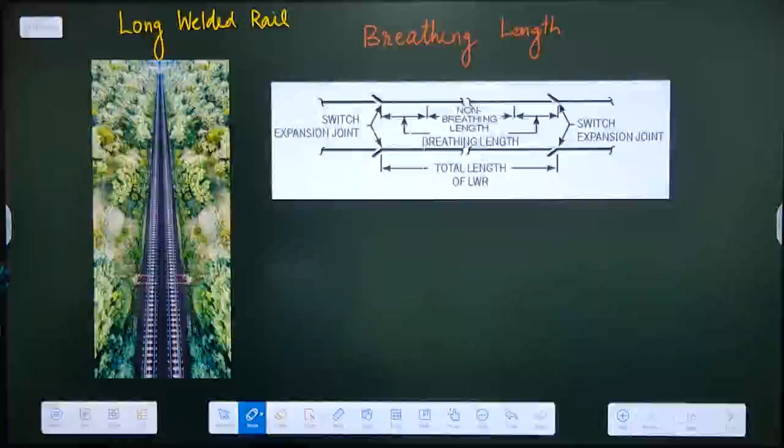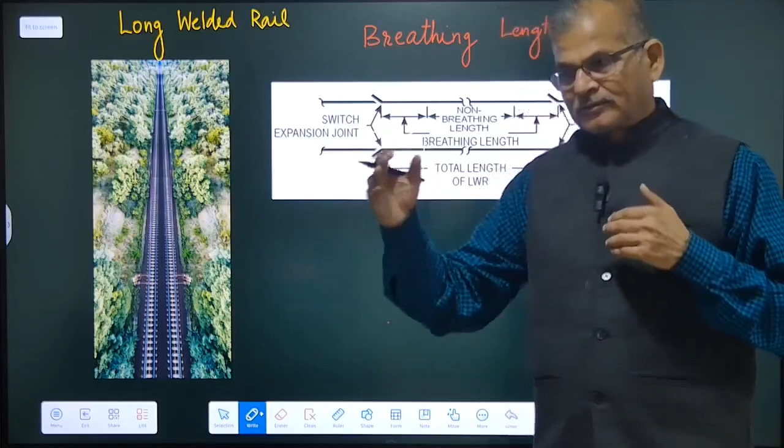आज के इस लेक्चर में हम लोग ब्रीदिंग लेंथ इन लॉन्ग वेल्डेड रेल के बारे में स्टडी करेंगे। लॉन्ग वेल्डेड रेल, जो भी रेल लेंथ, वेल्डेड रेल लेंथ मोर देन 250 मीटर से एबव होगा इन ए ब्रॉड गेज, दैट विल बी टर्म्ड एज ए लॉन्ग वेल्डेड रेल। आजकल इंडियन रेलवे जो भी रेल की लेंथ एक्सेप्ट कर रहा है, दैट इज मोर देन 260 मीटर। तो फॉर हाई स्पीड एंड लो मेंटेनेंस वी गो फॉर द लॉन्ग वेल्डेड रेल।

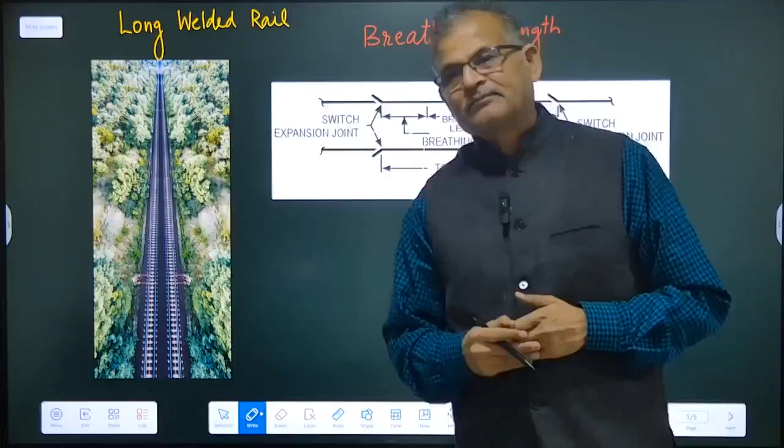इसमें किसी भी लॉन्ग वेल्डेड रेल को हम लोग 3 सेक्शन में बांट सकते हैं, 2 एंड्स और थर्ड इज ए सेंट्रल पोर्शन। जो सेंट्रल पोर्शन होता है नॉन ब्रीदिंग लेंथ होता है, दैट डजंट गो इन एक्सपेंशन एंड कॉन्ट्रैक्शन।

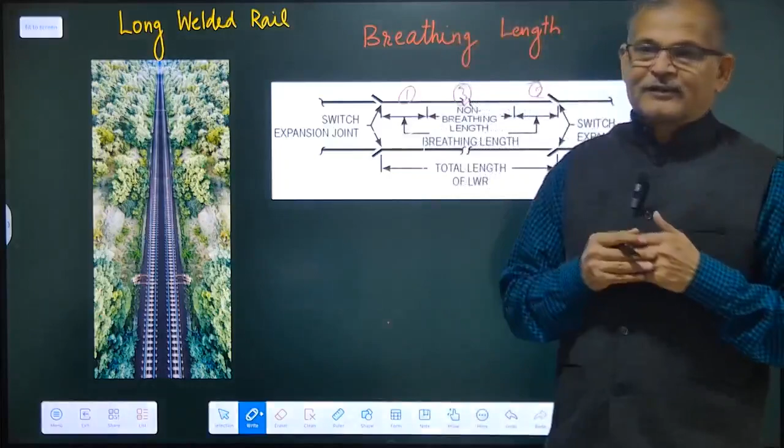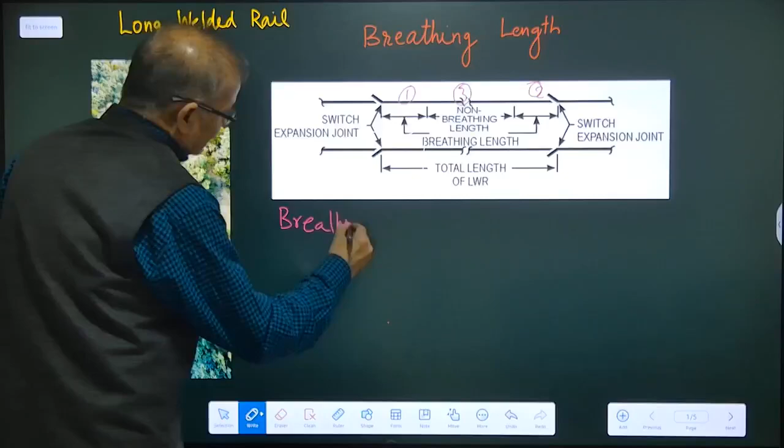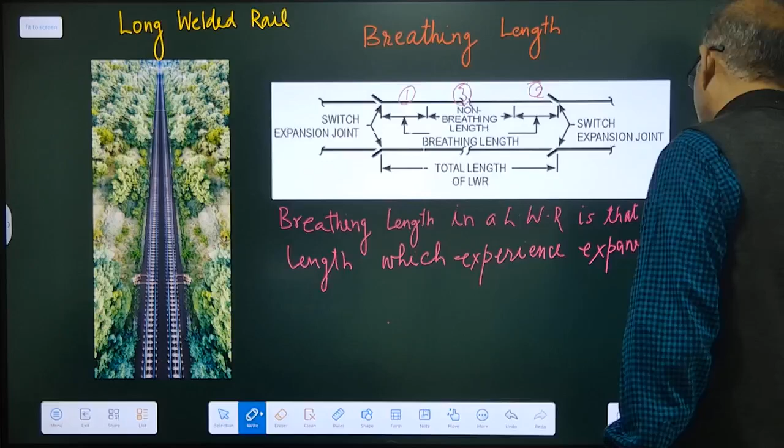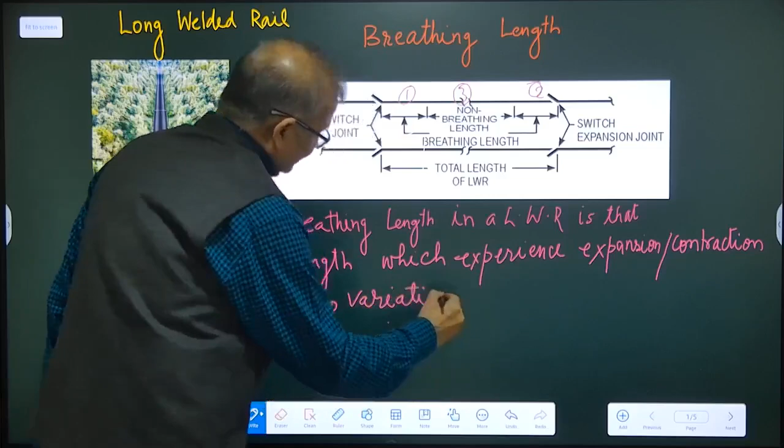Breathing length is that length in a long welded rail which experiences expansion or contraction due to variation in temperature.

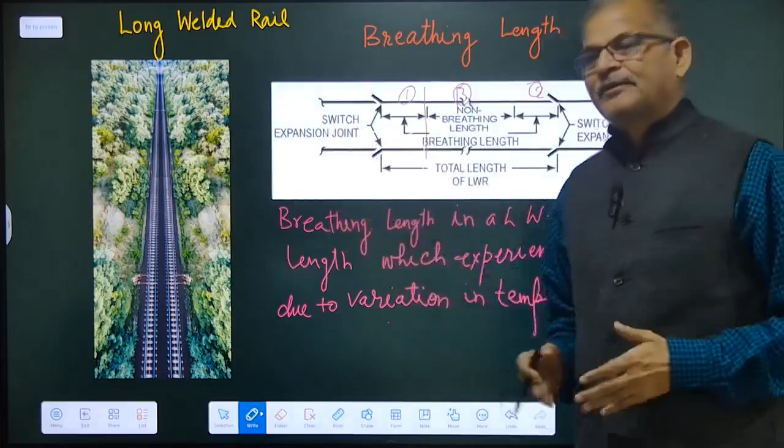So in long welded rail, we can say this is non-breathing length. Total length means non-breathing length plus 2 times the breathing length will be the overall long welded rail.

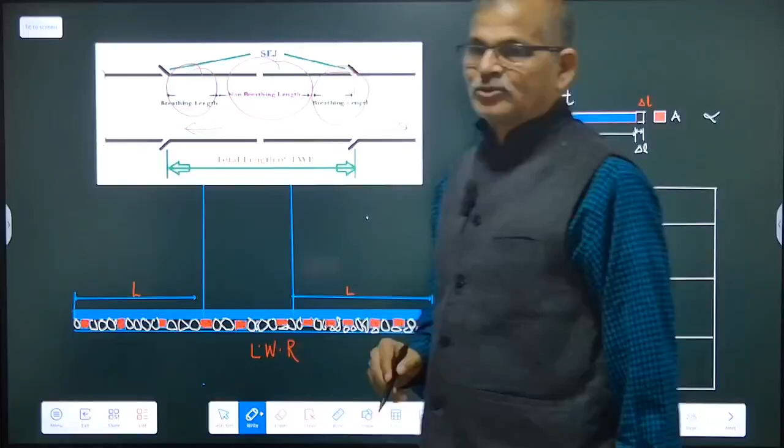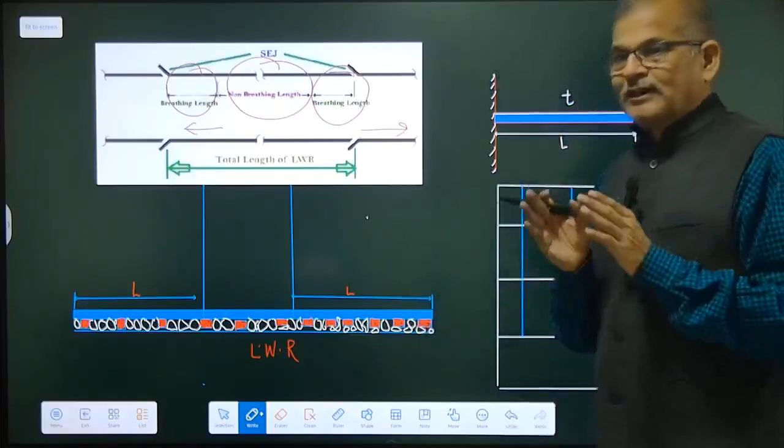Now if the rail is free to expand and contract, then the length change delta L will be the multiplication of thermal coefficient, temperature and length. So if this is free due to temperature variation, its expansion contraction, if we free it, then the change in length will be delta L. This delta L we can say is change in length.

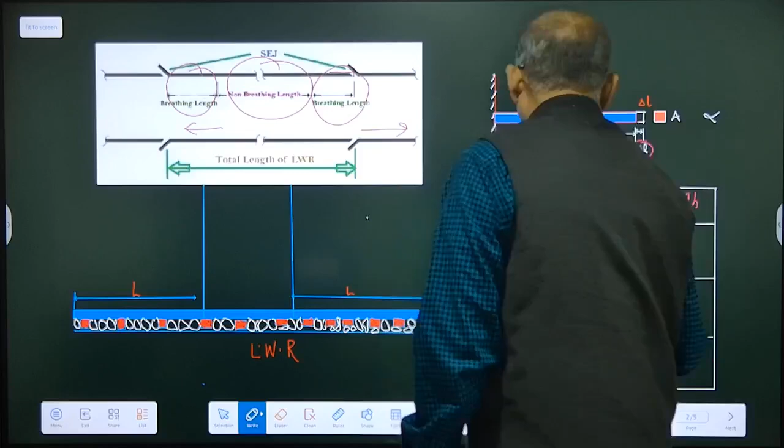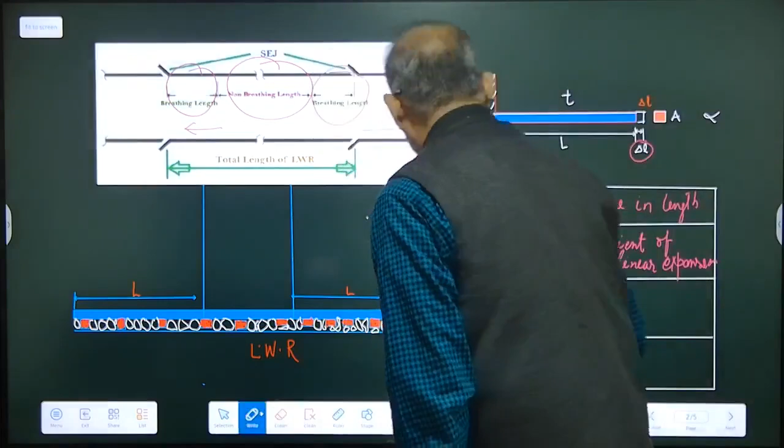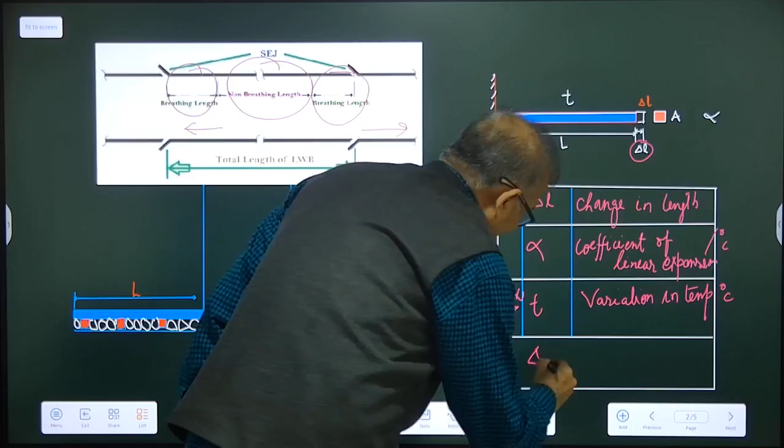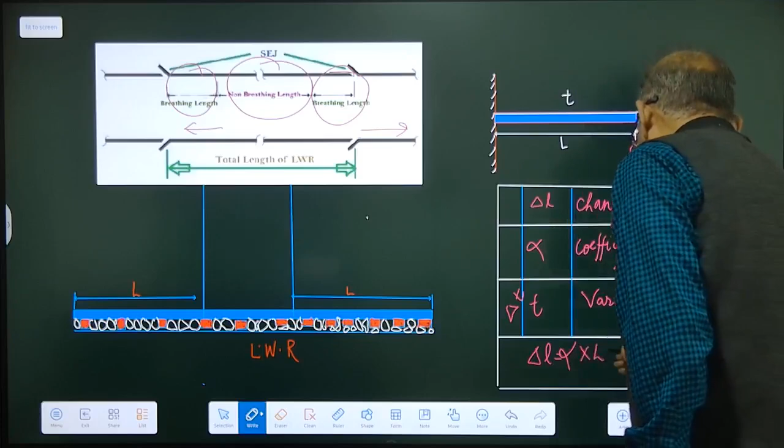And alpha is coefficient of linear expansion or thermal expansion. And T is a change in temperature, or we can say variation in temperature. Sometimes it is denoted by delta T also. Initial temperature minus final temperature, meaning temperature at the time of laying, and then final temperature. So variation in temperature in degree centigrade, this is per degree centigrade. Then change in length delta L will be given by the multiplication of coefficient of thermal expansion into length into variation in temperature T.

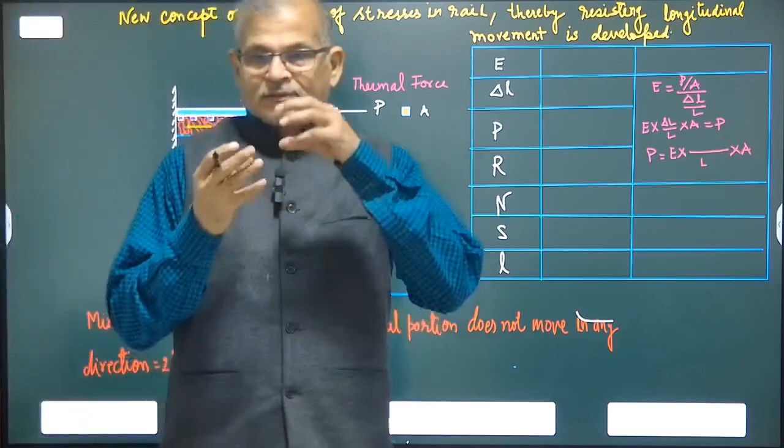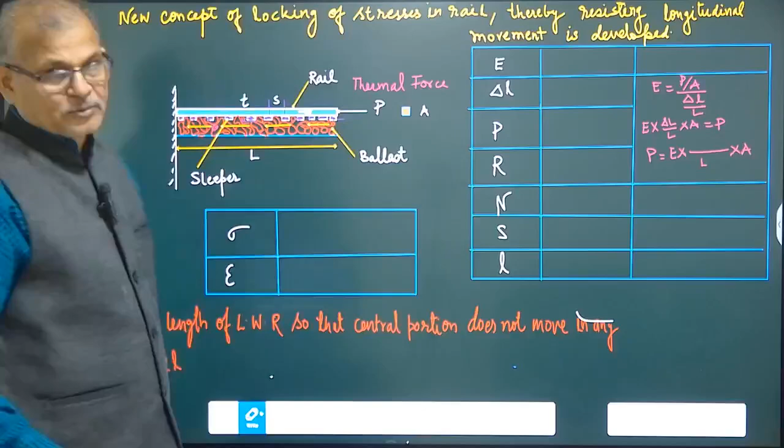So the length of rail that would expand, if it is allowed to freely expand, it will be by amount L into alpha into T. Now this change in length we restrain by, since the rail is fixed with the clips, the Pandrol clips, clips along with sleeper, and sleeper is embedded in the ballast. So when due to change in temperature whatever stress develops, whatever force develops, it will be counteracted by, it will be restrained by the ballast and sleeper.

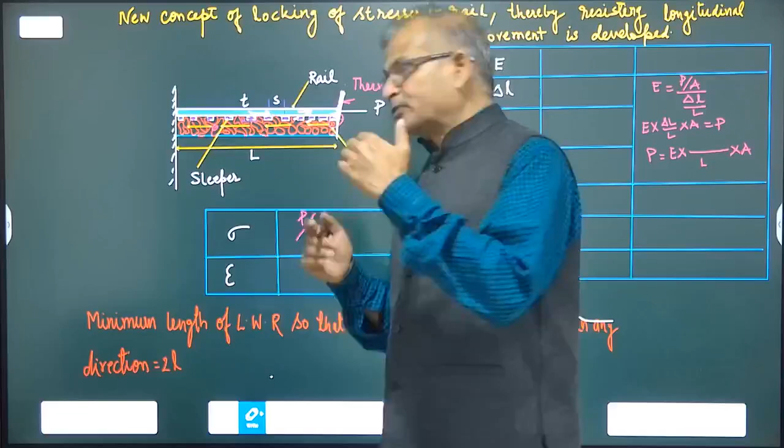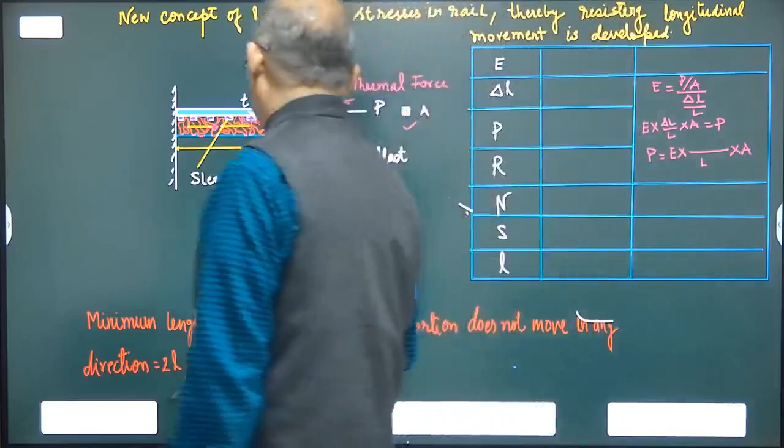So we will see further how this works. Stress is P by A and the strain will be delta L over L, or it will obey Hooke's law, in which Young's modulus is stress over strain. So E is Young's modulus, and it will be equal to stress over strain.

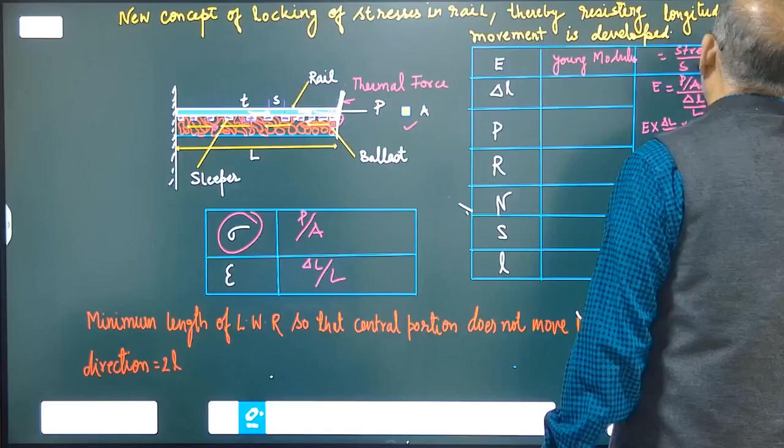Stress is P by A, strain is delta L by L. Solving it, we get E into delta L over L into A is equal to force - the internal force which has been locked up, which has not been allowed to move because of this resisting force. That P will be E into delta L over L into A.

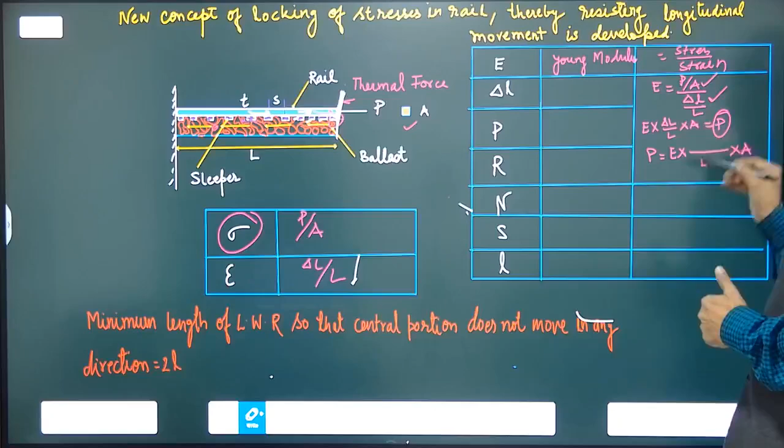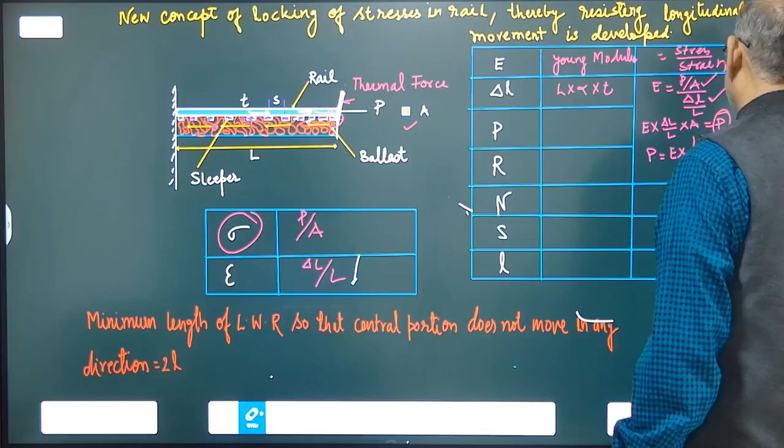Now we know that delta L is equal to L into alpha into T, the change in variation. So we can place here L into alpha into T. This L and this L get cancelled. So here we find the resisting force required. Either we can say resisting force required, or we can say locked up internal force - the locked up internal thermal force.

So here we can say locked up internal thermal force will be P is equal to E into alpha into T into cross-sectional area of the rail, and R is the resisting force.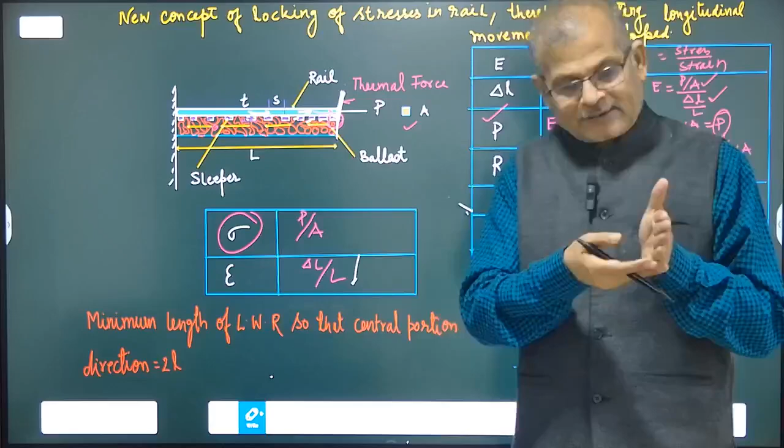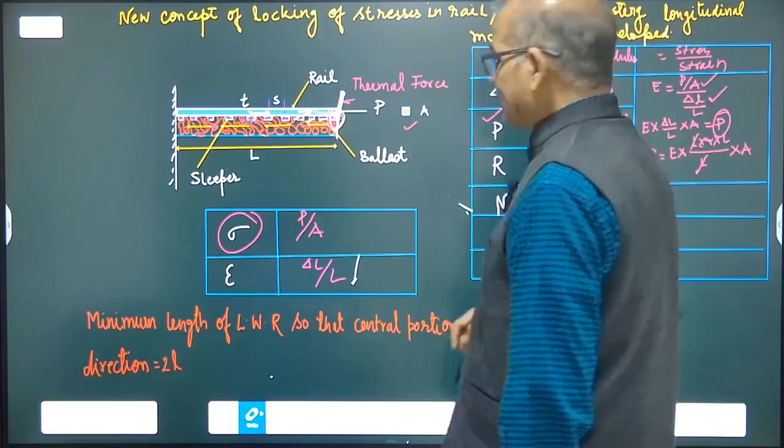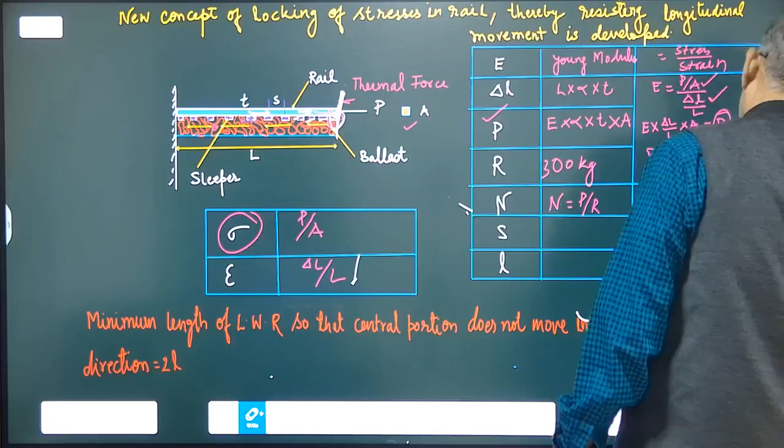Then we require to find how many number of sleepers will be required. This number will be P over R, or we can say E into alpha into T into A over R, and R is nothing but the resistance offered - the frictional resistance offered by one sleeper embedded in the ballast.

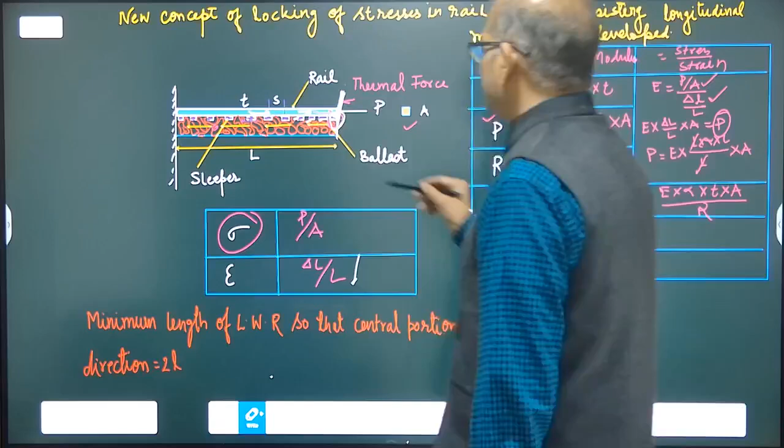And S is the spacing of sleeper, which is generally between 0.60 meter to 0.65 meter. This spacing within the sleepers varies from 0.60 to 0.65 meters.

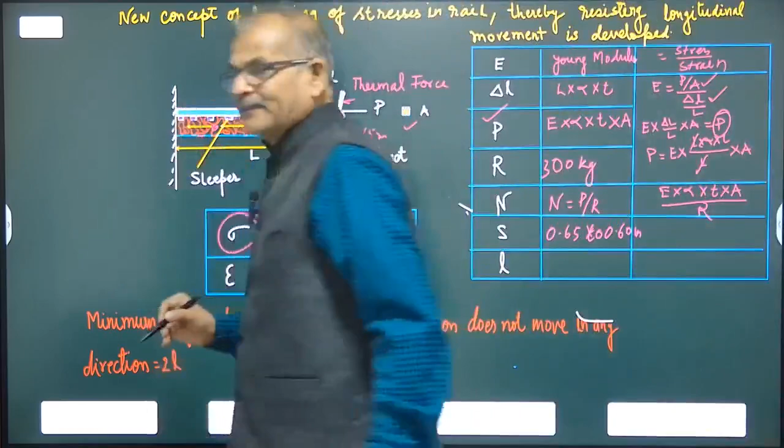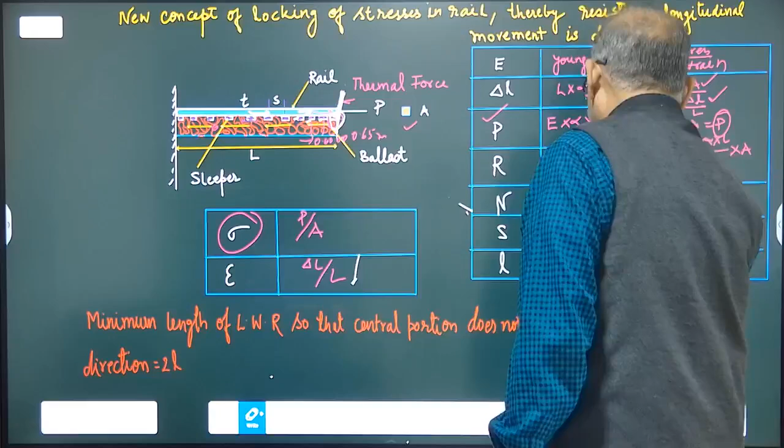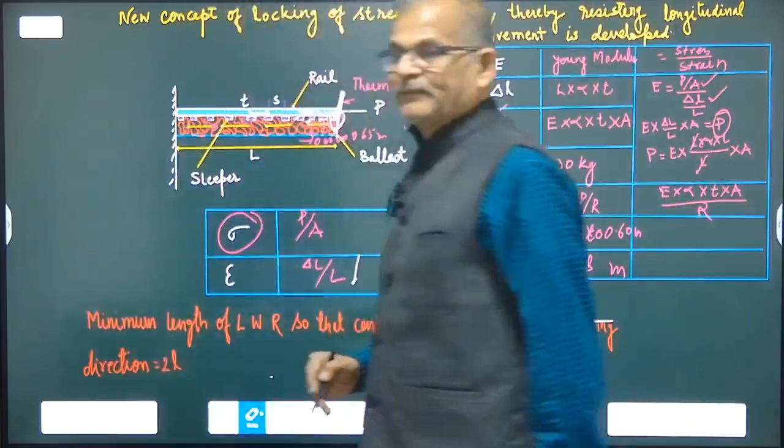Now what will be this length L - the length required to place the number of sleepers so that their longitudinal movement is restrained? So L will be n minus 1, the number of sleepers minus 1, into the spacing. Then we get this length - how much breathing length will be required to restrain the longitudinal movement of the rail.

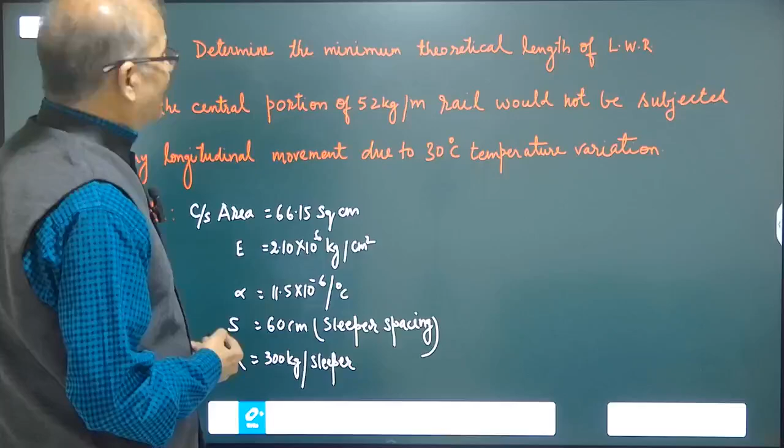So we can take up one problem on this. Determine the minimum theoretical length of long welded rail beyond the central portion of a 52 kg per meter rail which would not be subjected to any longitudinal movement due to 30 degree centigrade temperature variation.

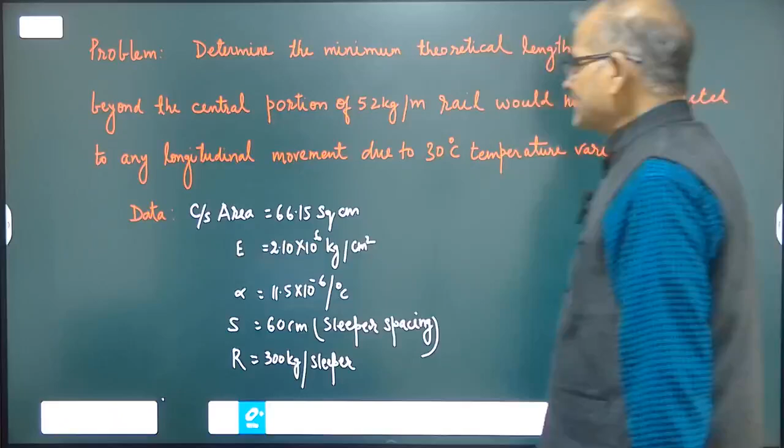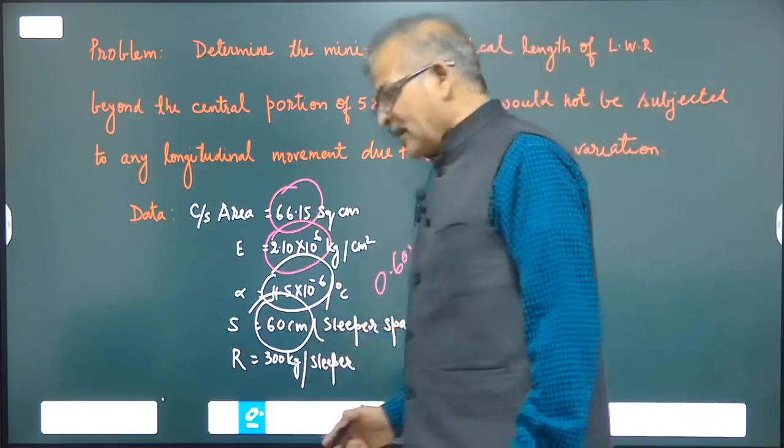So the data given is: cross sectional area 66.15, Young's modulus is given as 2.10 into 10 to the power 6. Coefficient of thermal expansion is given as 11.5 into 10 to the power minus 6 per degree centigrade. Spacing of sleeper is given as 60 centimeters, meaning 0.60 meters, and resistance offered by per sleeper is 300 kg. So we need to solve this.

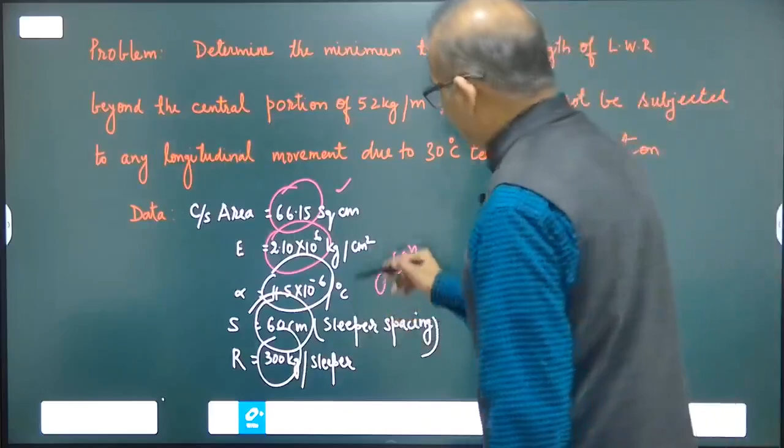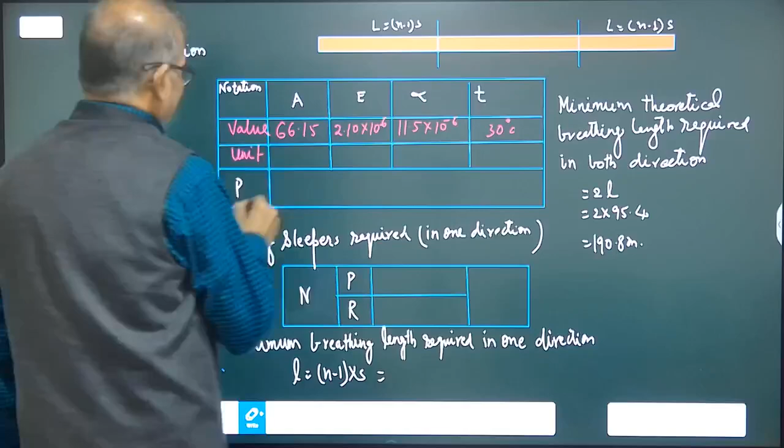So let us input: A is given in the problem as 66.15 in centimeter square. E is given as 2.10 into 10 to the power 6 in kg per cm square. Alpha is 11.5 into 10 to the power minus 6 per degree centigrade, and temperature variation is given as 30 degree centigrade.

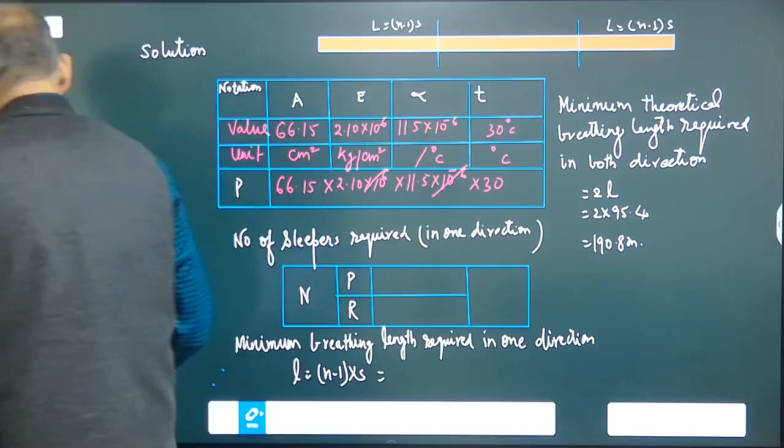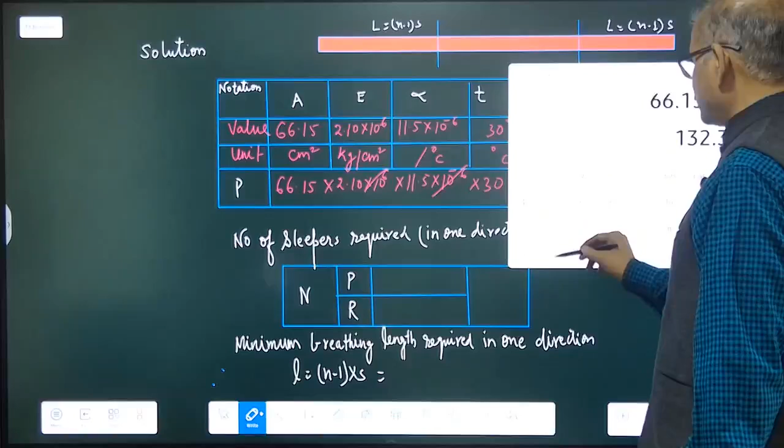So P will be equal to 66.15 into 2.10 into 10 to the power 6 into 11.5 into 10 to the power minus 6 into 30. This and this will get cancelled, and we can calculate it: 66.15 into 2.10 into 11.5 into 30 is equal to 47925.

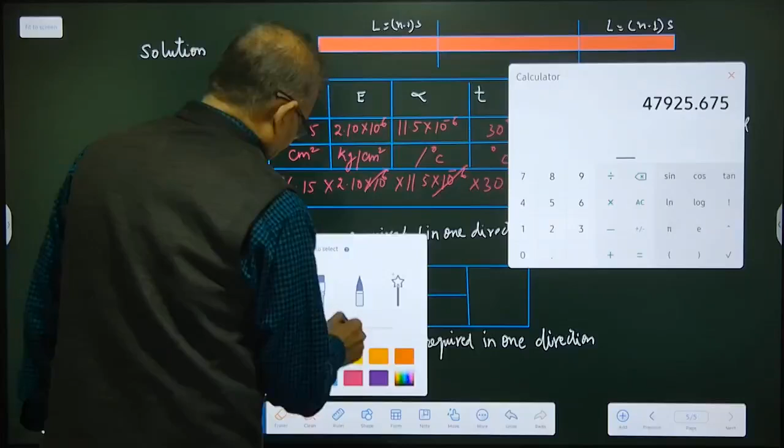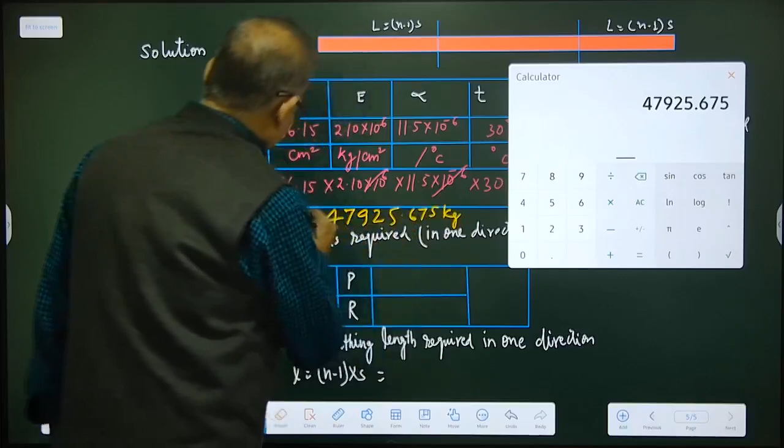P will be equal to 47925.675 kg. The internal thermal force developed in the rail is 47925.675. Now we require to find how many number of sleepers will be required to resist this force.

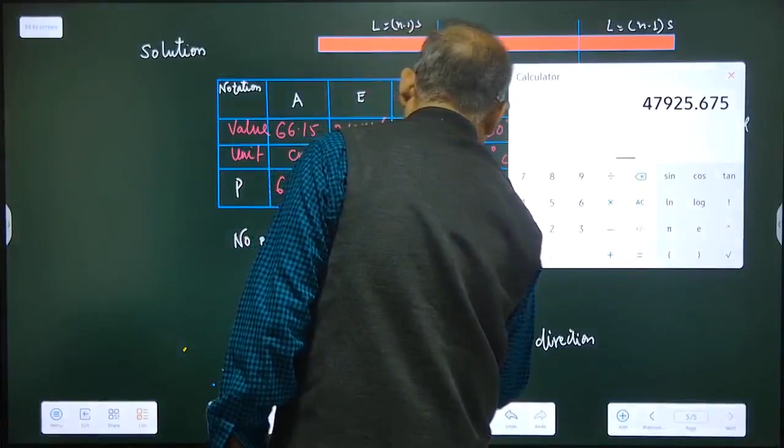So P is given as 47925.675, and each sleeper embedded in ballast has resisting force or frictional force of 300 kg. So we can get the number of sleepers required by dividing by 300. So number of sleepers required will be 159.75, say 160 numbers.

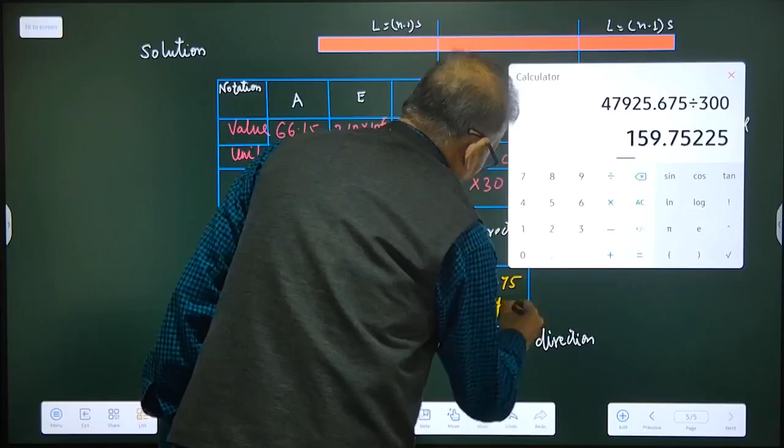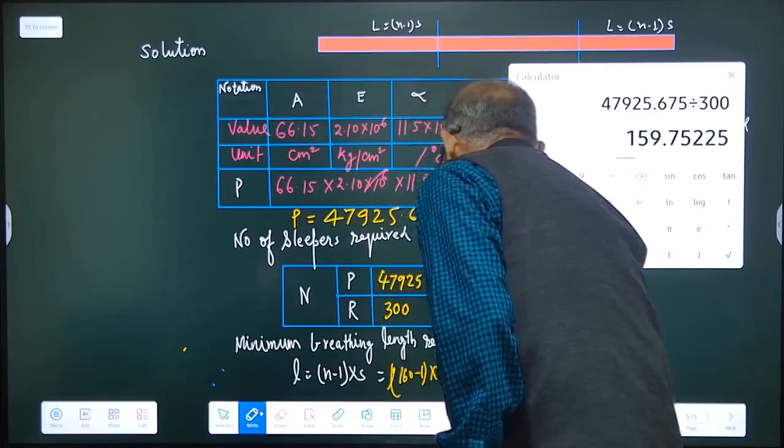Now the spacing is given as 0.60 meters. So the breathing length required, L, is equal to n minus 1, meaning 160 minus 1, into spacing of 0.60. So we can calculate it: 160 minus 1 equals 159 into 0.60 means 95.4.

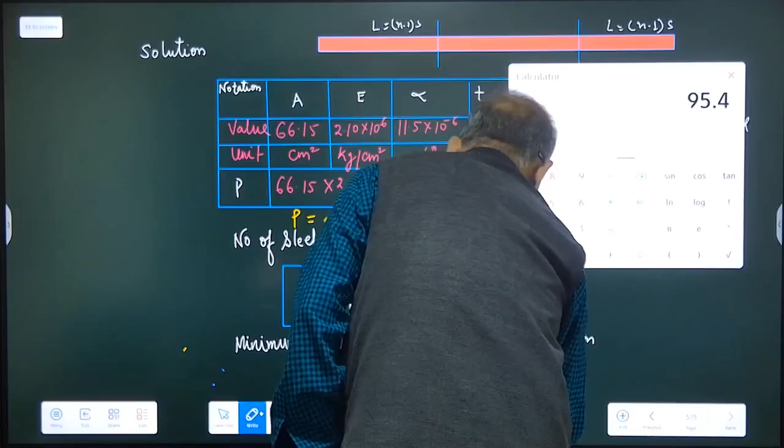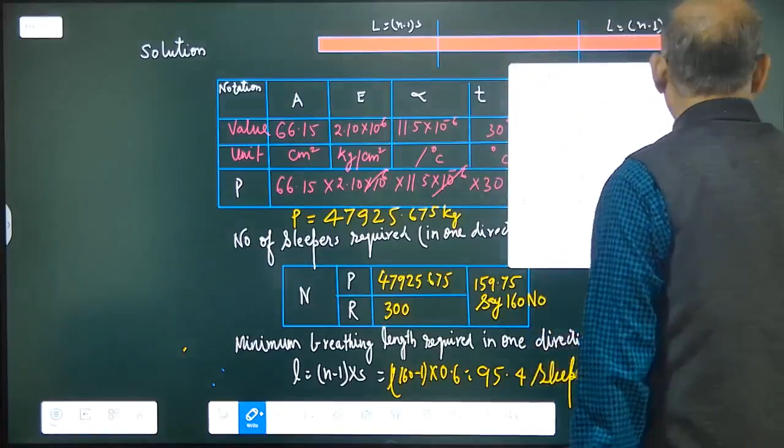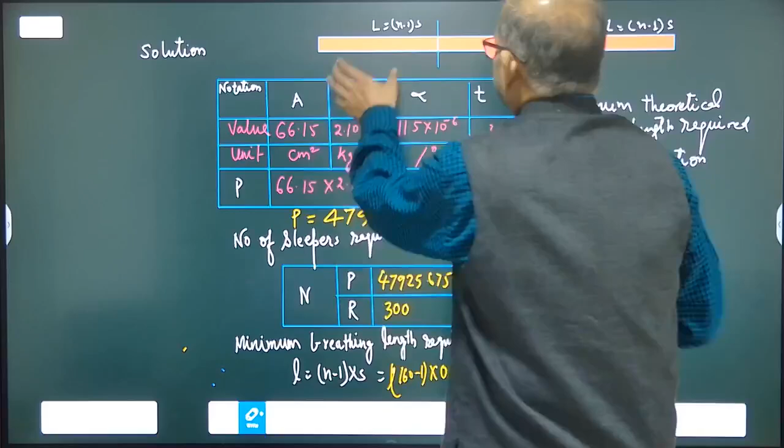95.4 sleepers will be required. Sorry, 95.4 meters - 95.4 meters breathing length will be required at one end to restrain the longitudinal movement of the rail.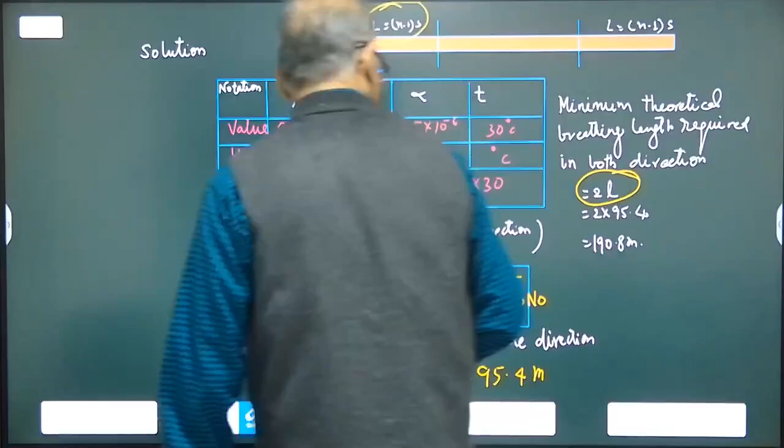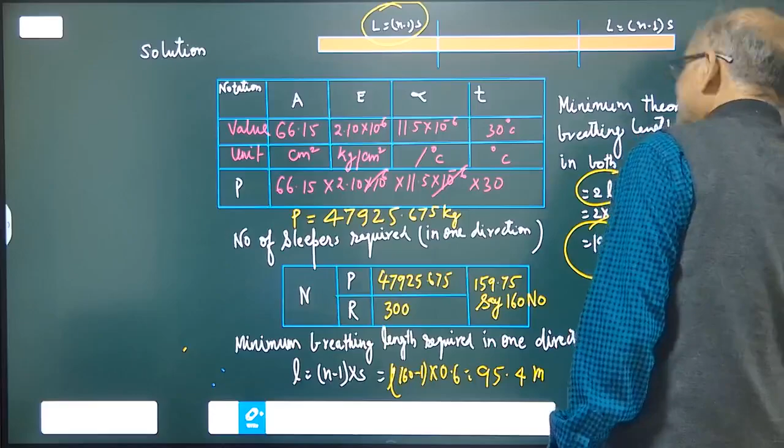So in both the sides, taking 2L, it will be 2 times 95, we can find it is 190.80. We can say it is 191 meters or 200 meters - meaning on each side, if we keep 100 meter breathing length, the longitudinal movement of this rail will be restricted. And in this LWR, even after this, we also provide the switch expansion joint etc. This is the theoretical calculation of finding out the breathing length of the rail due to temperature variations.